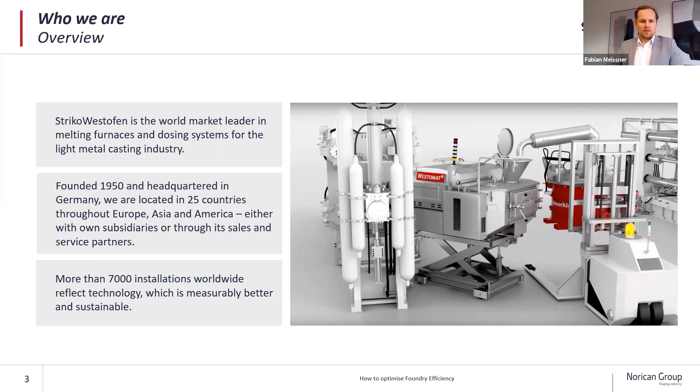And then last on the right hand side, you can see myself. As mentioned, I'm responsible for the sales of StrikoWestofen equipment in the Turkish market. All in all, I think we can offer you a good package.

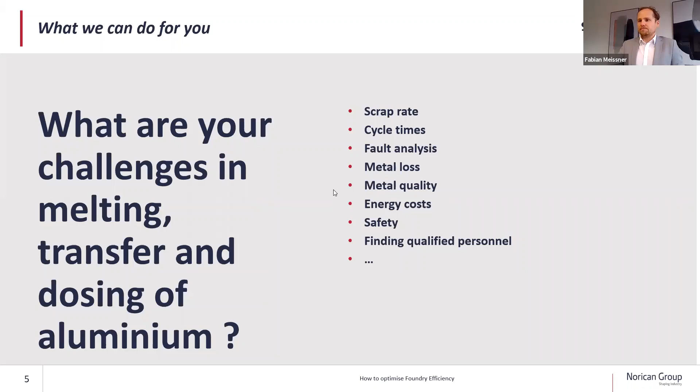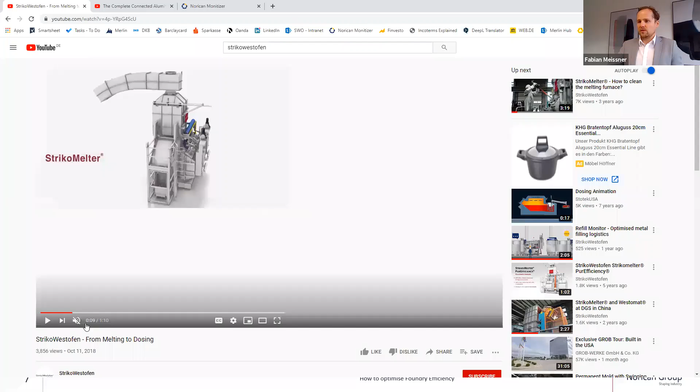Let me share a short video to give you a visual idea of how our solutions look. I will show you this short video of 1.5 minutes, which you can also find on YouTube if you want to see it later.

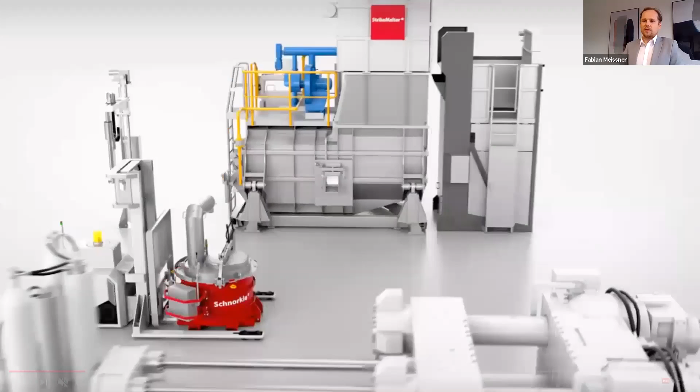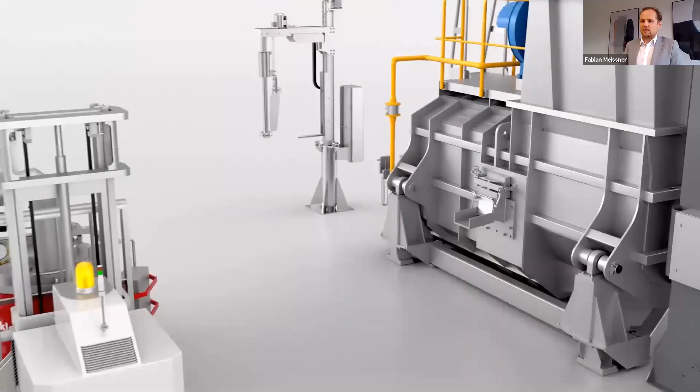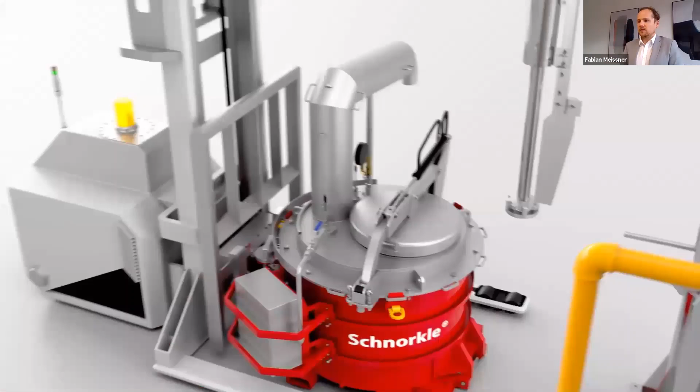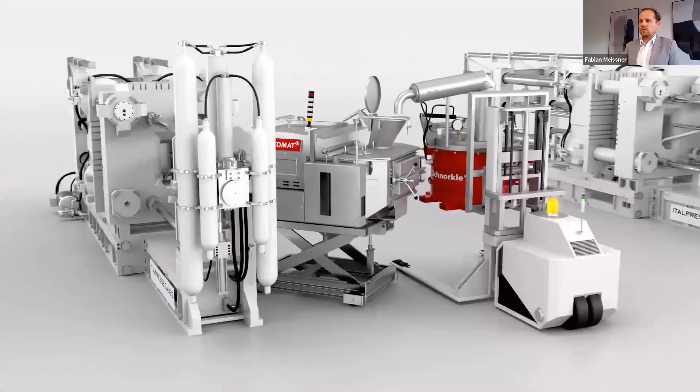Now it's moving to the degassing unit, which we can also supply, doing the degassing process in the Schnorkle, the safe enclosed transport system, and then moving to the die casting machine and to our dosing furnace, the Westomat, delivering the liquid aluminum to the dosing furnace. These are the three products I'm going to talk about today, and I'll give you an overview.

On the shaft melting furnaces, the StrikoMelter, we have around 50 units or more than 50 units in operation in Turkey today. One factor is a very low energy consumption. Another factor is a very high metal yield—you lose very few metal. This can be a couple of €100,000 per year in savings compared to other furnaces.

We have very durable, very high quality equipment. Most furnaces, nearly all furnaces, have a lifetime of more than 20 years, and it's a proven technology. That's why we have many customers in Turkey working with our StrikoMelter.

Then here you can see the Schnorkle, our closed transport system. It's a new product compared to the StrikoMelter and Westomat—a rather new product. Why could it be interesting for you?

It's minimal heat loss because it's closed. If I compare it to a normal transport ladle, you have a high metal quality because you have less contact of air and metal. You have high safety for human and machine because it's a closed system. When delivering aluminum into the dosing furnace, you have a constant flow into the furnace. It's a pneumatic system which ensures an optimal dosing furnace filling, creating less turbulence in the dosing furnace.

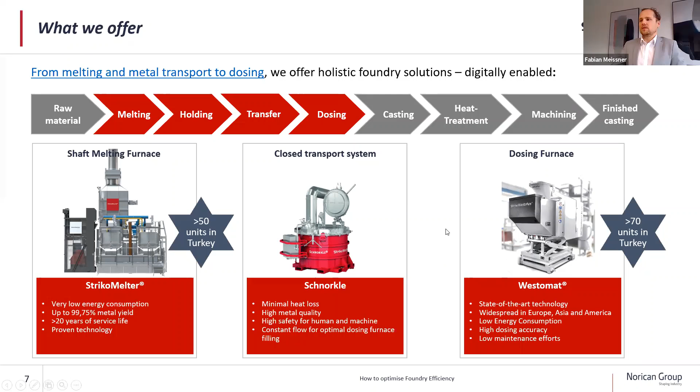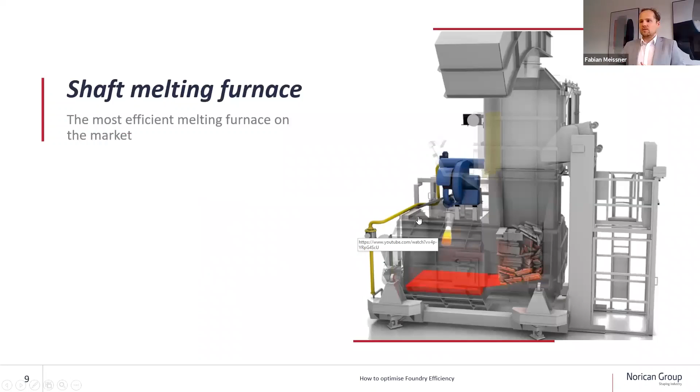So if I may, I would like to start with our StrikoMelter. As mentioned, it's a shaft melting furnace. So what is a shaft melting furnace? A shaft melting furnace is combining the preheating, the heating, and the liquefaction of the material in one shaft.

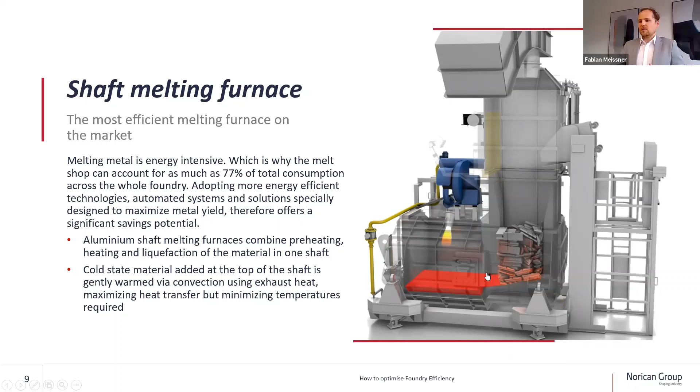So we are using the combustion heat from the holding bath to preheat the material in the shaft. This enables us to use much less energy, or to consume much less energy, and to achieve a much lower metal loss than if you just, for example, alternative technology would be: you take the material, the aluminum, and you put it on a ramp.

On the ramp, you don't have this preheating effect. You are taking the burners and directly impacting the material. This needs more energy because it's not preheated, and it also generates more oxides, because if you directly hit the material with the flame of the burner, a lot of oxidation is created.

I would say, in summary, the secret of the StrikoMelter is in the shaft. It's a lot of technology and a lot of developments over many years that have gone into this shaft, and there's right now no good copy available on the market.

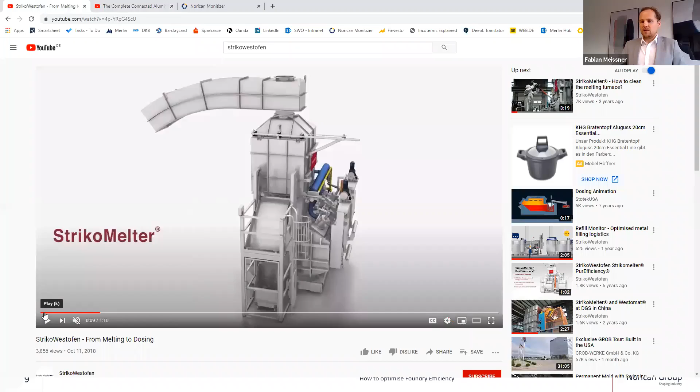So let me show you another video on the process of the melting furnace, the StrikoMelter.

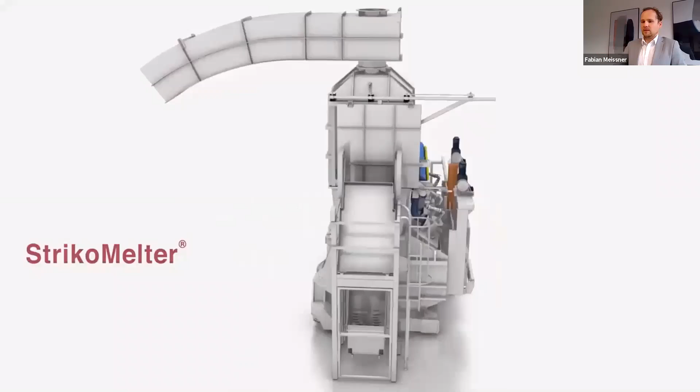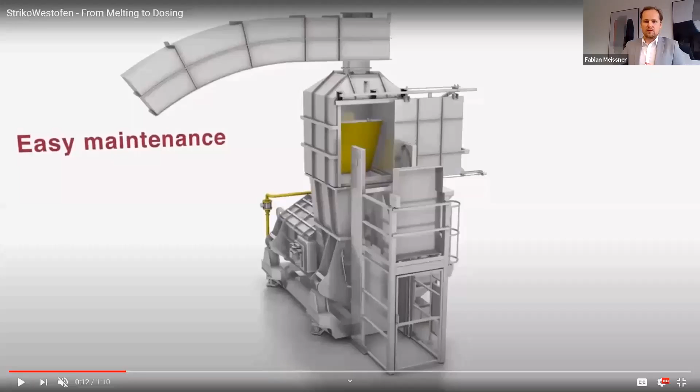So you can see the charging now. Normally we charge a furnace with a so-called charging unit. You have a bin inside of the charging unit, and normally this bin is put into the charging unit by an operator. Once the furnace gives a signal to the charging unit, the charging unit will charge the material into the top part here, into the shaft.

You can find the perfect moment for charging the new material into the shaft with a shaft laser. You can see it here. It's a laser that is going into the shaft and scanning the level, the filling level of the shaft, and when it's below a certain point, it will start charging again. This makes sure that we have a perfect filling level that achieves the lowest energy consumption in the shaft.

Then you can see here the yellow part, that's a baffle or flue cover. This cover is closed once the furnace is charged to make sure that the heat is kept in the furnace.

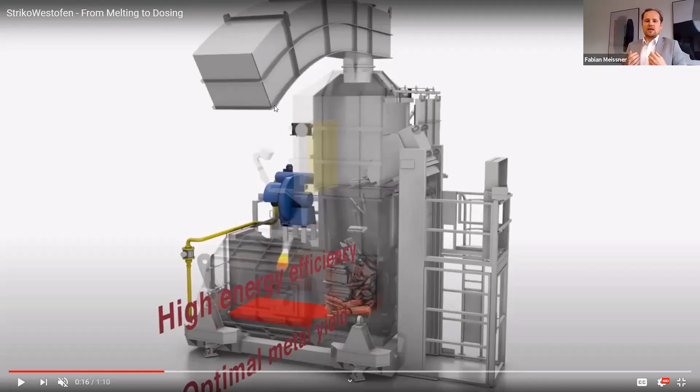We have, you can see, a tiltable version. It's able, if you want to tap out or take out the metal, you can move it, in this case now towards you, and then take out the metal from the furnace. Or we have another version, a tap version or tapping version, where you have an automatic or semi-automatic valve, which you use to take out the metal. There are these two major versions.

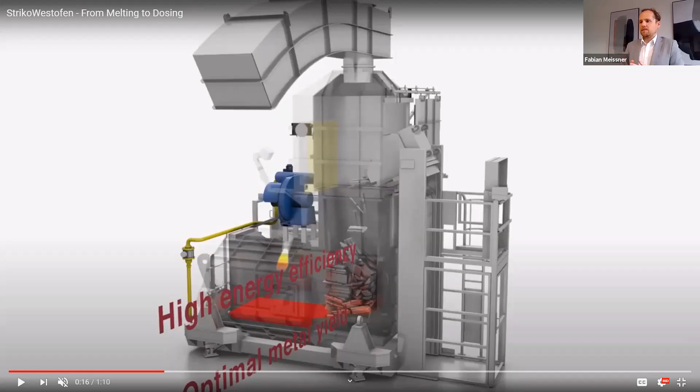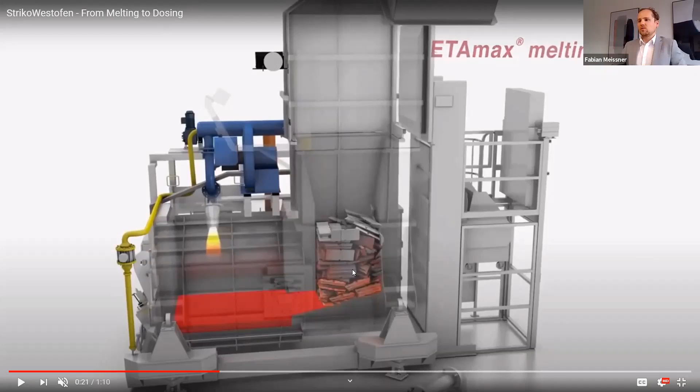You can see it's charged now, and now the preheating of the material is done. The combustion air, due to some under pressure, is going into the shaft, using the heat to preheat the material, and it's slowly melting down and going into the holding bath of the furnace.

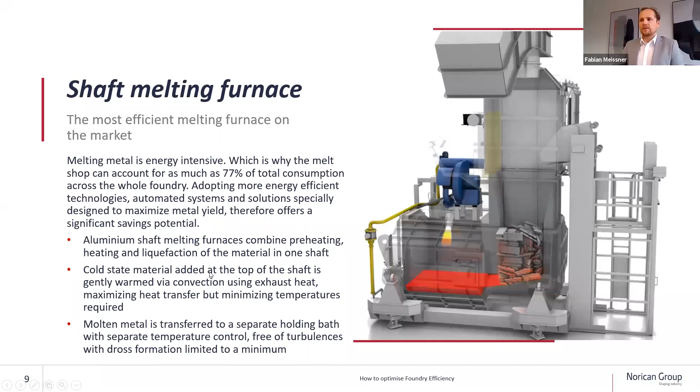So what can we achieve with this technology? We can achieve, as mentioned, an extremely low energy consumption. We have measured values in the field as low as 489 kilowatt hours per ton of molten aluminum. It is the most efficient melting furnace on the market.

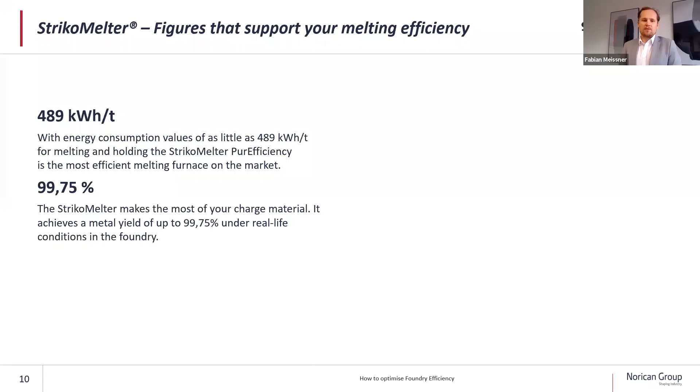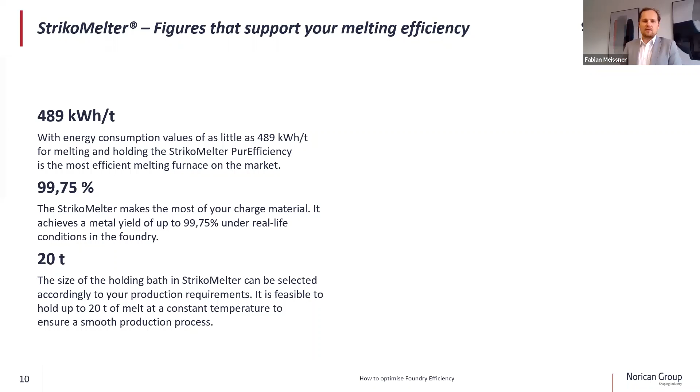We can achieve, or we have measured in the field, a metal yield of up to 99.75% under real life conditions in the foundry. We build furnaces with a holding bath size of up to 20 tons. We can melt parts of up to 2.5 square meter size in our shaft. We can even make the shaft bigger, so for example, when you're working now with structural parts, this could be an interesting solution for you.

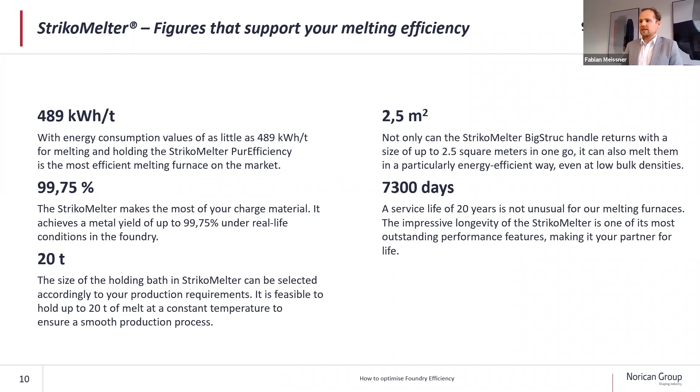As mentioned, our furnaces are very long lasting, and a service life of 20 years is not unusual. We have more than 1,500 shaft melting furnaces, the StrikoMelter model, in the field. This has always helped us to further improve and optimize our system.

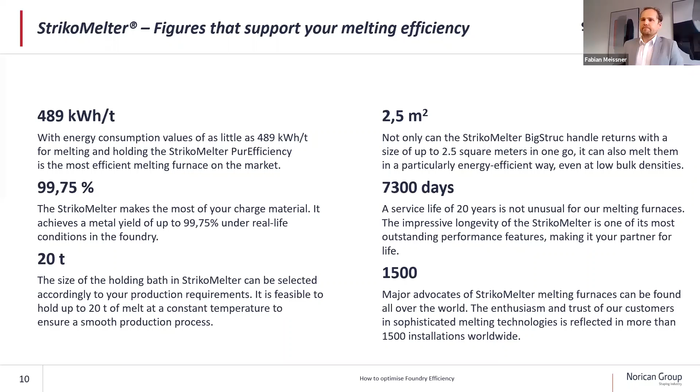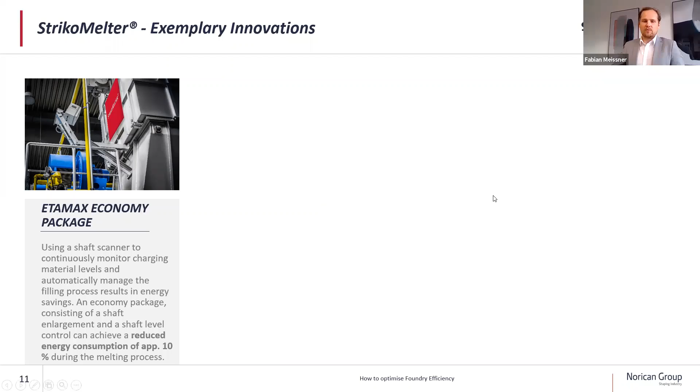We are always constantly working on improving our system. I will not talk about all of our innovations in the last years now, but I would just like to give you some impressions. If you look at these four innovations for the StrikoMelter, what do you think they have in common?

The commonality is that all are focused on generating additional benefit for our customers. As you can see, there's an ETAmax economy package, consisting of the shaft scanner, which you can see here, and an enlarged shaft with a higher volume. If you take this package, you can achieve an energy consumption reduction of approximately 10%. It's not the case for every type of casting, but for many it is. When you have an inquiry, we can look at your castings and the returns you're intending to remelt, and we can evaluate this.

We have also developed a new special type of shaft cover, or so-called hot gas baffle. The hot gas baffle is closed during the free melting process. For every shift, you need to close the hot gas baffle to free melt the shaft once. This baffle makes sure that the free melting process is even faster and consumes less energy - in this case, around 15% less energy consumption during the free melting process.

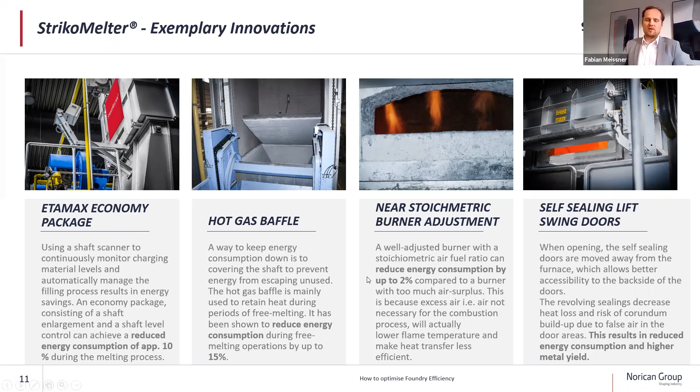Another innovation in the area of our software solutions is the so-called part load efficiency control. That's a software solution that makes sure your melting process is running efficiently even when you are not operating your furnace at full capacity. Sometimes you're only using 50% or 60% of the melting capacity of the furnace, and for this situation we've developed a special software which we launched to the market this year, called the part load efficiency control. It's really impressive what you can achieve with those adjustments in the software and operation of the furnace.

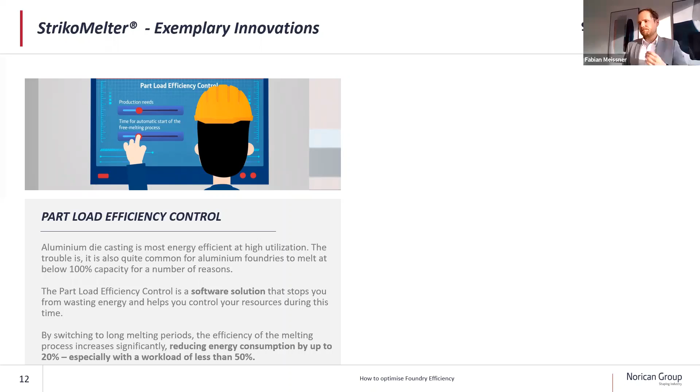Another digital product that we launched to the market this year is not only for our melting furnace or dosing furnaces - it can also be used for die casting machines or any other type of equipment in your foundry. It's called the Monitizer Global, and it's a digital platform that you can use to access all of your machines' or foundry's data in a good dashboard. We have built up the architecture to easily extract information from the machines, transfer the information to the cloud, and then display it in the front end, called the hub, or the Norican hub.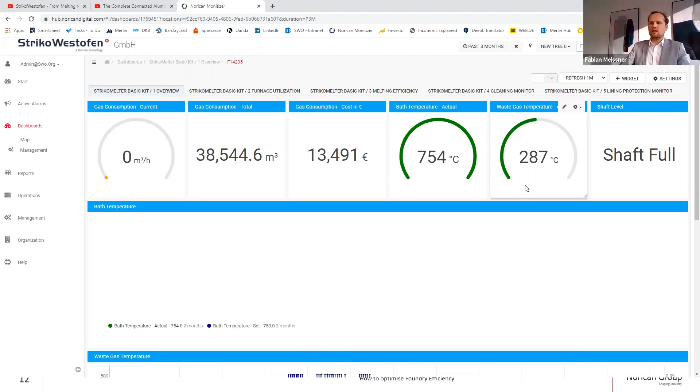To briefly give you an overview of how this looks, I'm showing you real live information from one of our systems that is online - one StrikoMelter located in Germany. You can see these views here, and you can create an individual view depending on what data you want to see. Here you can see, for example, what the gas consumption was over the last 3 months.

Let me change that - I would like to know what the gas consumption was over the last 6 months. Let me just refresh.

Over the past 6 months, with one click you can get all of this information, or you can see what the cost of the gas was when you put in your cost for purchasing the gas. You can easily see this here.

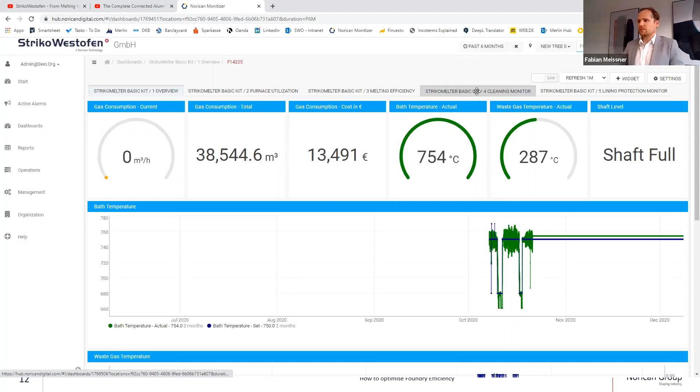You can see your actual bath temperature, the waste gas temperature, and so on. And you can, for example, also look at what were the free melting times.

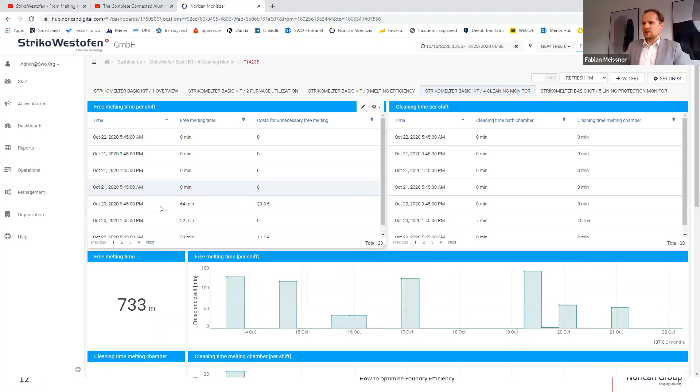If you look at the past 3 months, you can zoom in here into this week. You can see, oh, here I did a free melting time of 64 minutes. That's not necessary according to the standard, the manual. So you exceeded your free melting time, which costs you money. It actually costs you €23.80 at your gas price. So this is just one example of how you can use the software to check how well you're operating the furnace and maybe take some measures to improve and save money.

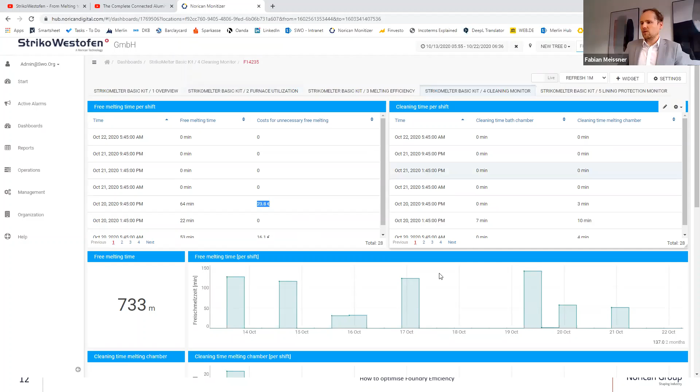You can see the cleaning times per shift: how much time was the holding chamber cleaned, how much time was the melting chamber cleaned. So you can monitor what else.

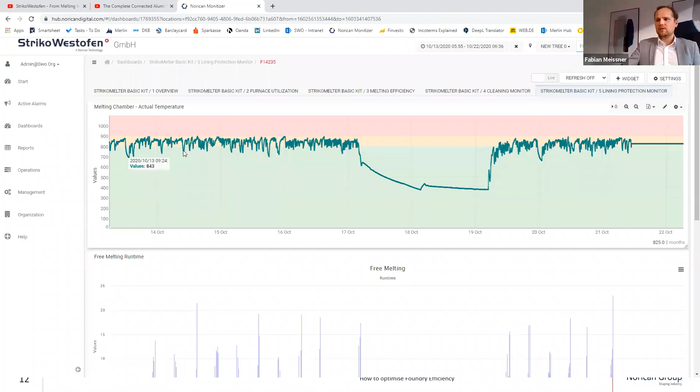You can see a lot of data, for example here you can see the temperature in the melting chamber. We normally say if you go above 900 degrees, you have a high risk of damaging your refractory, so this is a red zone. If you are between 800 and 900, it's not optimal - we would rather recommend to stay below that in the melting chamber. But this helps you see how the furnace is run, at what temperatures, over time.

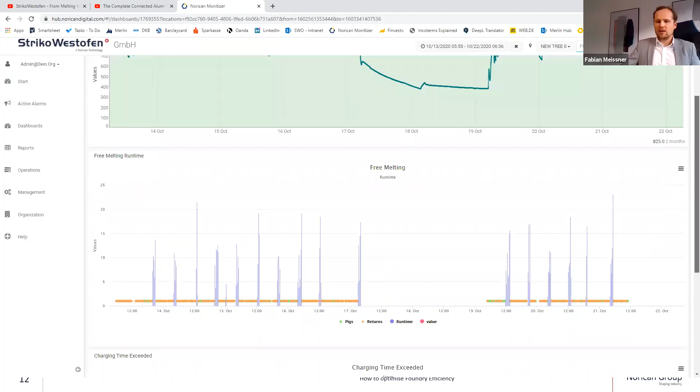So there are lots of possibilities that this new product, Monitizer Global, offers to foundries. If you're interested, we can also retrofit this in an existing foundry or existing equipment. It's not only possible to use new equipment with this software, but also to connect old or existing equipment.

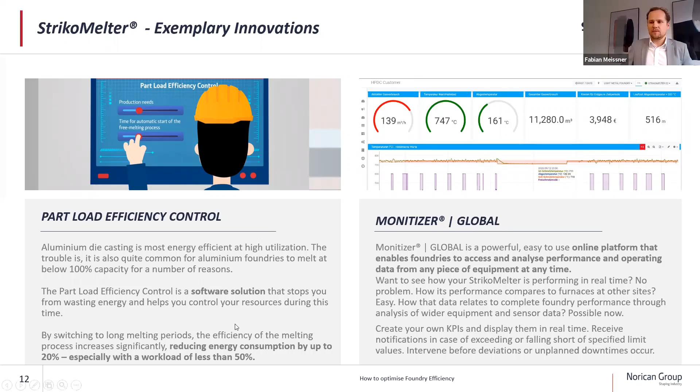Then I continue to our transfer solutions, the Schnorkle. As mentioned, it's a closed transfer system which helps you have a more reliable process because you have less contact with the air. It's a closed system - you're not moving around the foundry with an open ladle, and if there's an accident with the forklift, you may have health issues or people that get hurt.

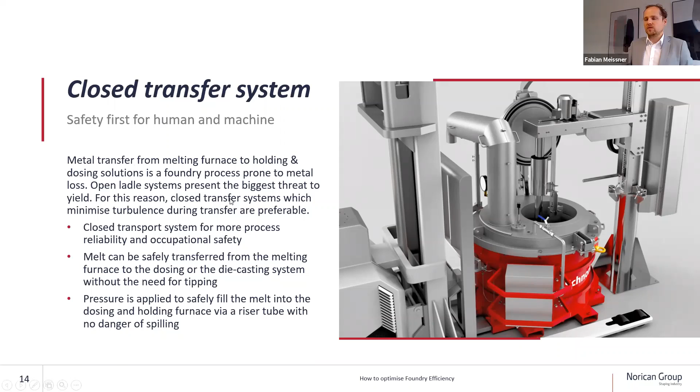This system is closed, so it's more safe. When you try to refill the dosing furnace or another type of furnace, you don't need to tip the ladle. You can use a pneumatic system to refill, so no tipping is needed, and there's no danger of spilling liquid aluminum, which creates danger for your personnel and colleagues.

Quality: there's less air contact during the transfer because it's closed. Less temperature loss - you don't need to overheat your metal in the melting furnace to account for losses, because in an open system, an open ladle, you might lose some aluminum during transfer. So you can actually be melting at a lower temperature because you lose less energy while transporting the aluminum to the die casting machine.

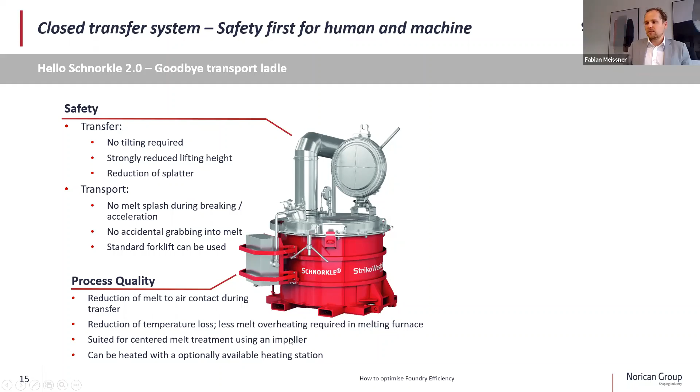You can also, like shown in the video, do the melt treatment in the Schnorkle. I think those are the main advantages I'd like to present on the Schnorkle: it's safe, it gives more process quality, and it's a more stable process that you can achieve, with higher metal quality.

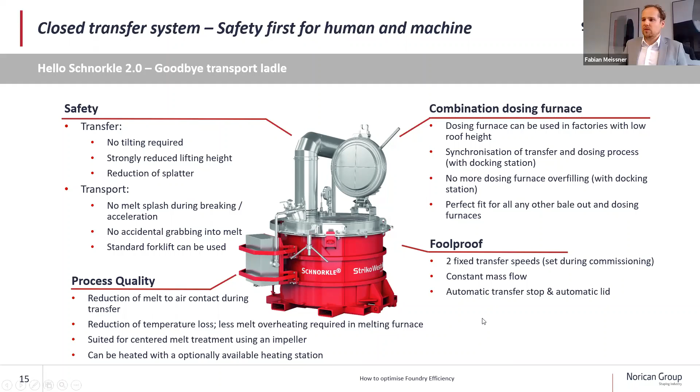Let me go to the dosing furnace itself and give you some general introduction. Let me explain the process.

We are working with an overpressure that is generated in the furnace chamber, and with this overpressure we are raising the metal in the riser tube, which you can see here, to a top stop position. A top stop position is basically where the metal in the riser tube is above the level of the bath in the furnace. So let me show you the animation.

Okay, so here you can see now we are creating the overpressure. We're starting to create the overpressure. You can see that the metal in the funnel here is rising, and then we are waiting for the signal from the die casting machine to start dosing into the shot sleeve. You can also see that the metal is taken from below the surface, so we are making sure we're not sucking in any oxides, which are not so many because it's a closed system.

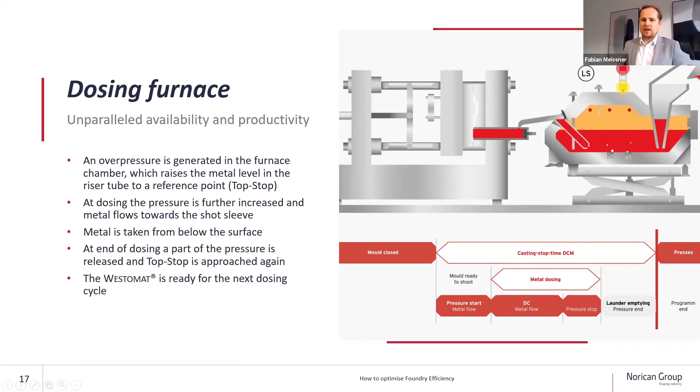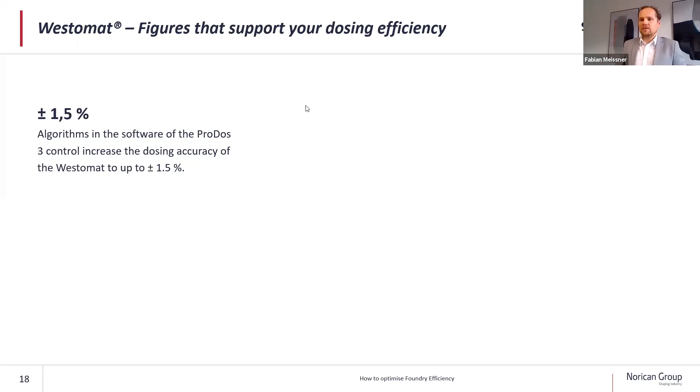It's compared, for example, to a holding furnace with a ladle. It has many advantages. Main advantages I would like to raise in general of the system are our high dosing accuracy. We have a sophisticated software developed over many decades, which is called ProDos 3. Due to the fact that there's no open bath surface, we have less energy consumption than an automatic ladle system with a holding furnace, which reduces energy costs.

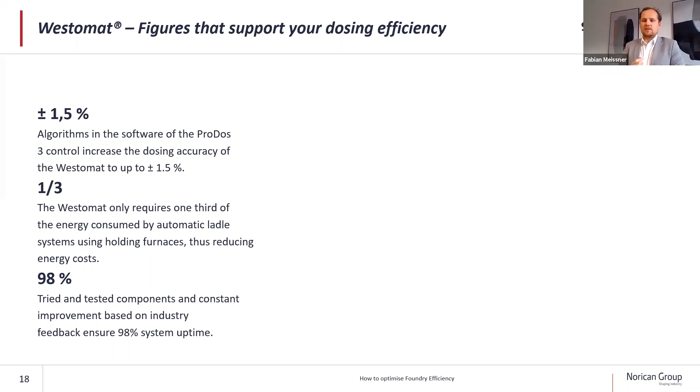It's a system that is nearly all the time running. Based on industry feedback, it's running 98% of the time, or even more. We have less metal loss than a ladle system with a holding furnace, because we don't have the open bath surface, and we have a very high temperature stability, again due to the fact that it's a closed system. Normally we maintain the temperature within ±2 degrees Celsius in the bath of our furnace.

Also compared to other systems available on the market, not only the ladle, but maybe also pump-based systems or other systems, there are many advantages. So if you have doubts about that, we're happy to have a technical discussion with you on the differences between the different systems and the potential advantages and disadvantages for you.

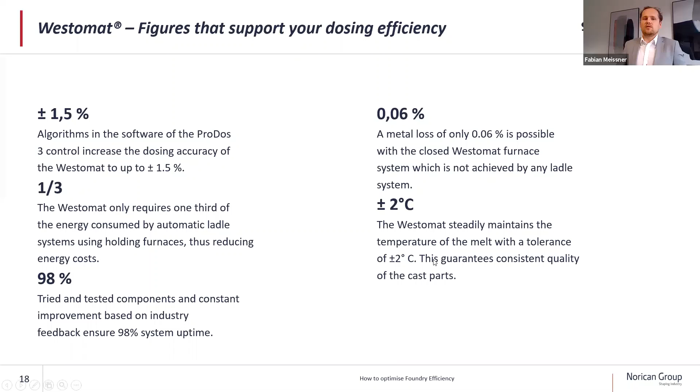Also, like for the StrikoMelter, I would like to present some innovations to you, only some. This year we launched a new model of our Westomat. It's called Westomat Duo. The difference compared to our classic Westomat is that we have two openings here, one on the left and one on the right. Normally the opening is here.

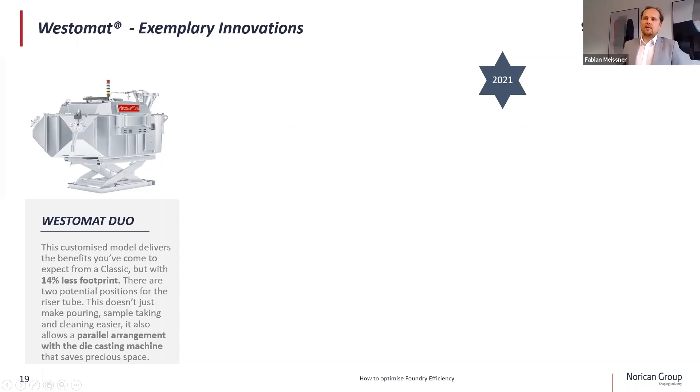This enables us to achieve a parallel arrangement of the die casting machine and the dosing furnace. So instead of having it like that or like that, we can actually put both machines in parallel. This has a big advantage if you have not so much space, maybe in your foundry, because it's a historic foundry or so. Then you can sometimes squeeze in an additional die casting machine with this parallel arrangement of die casting machine and dosing furnace.

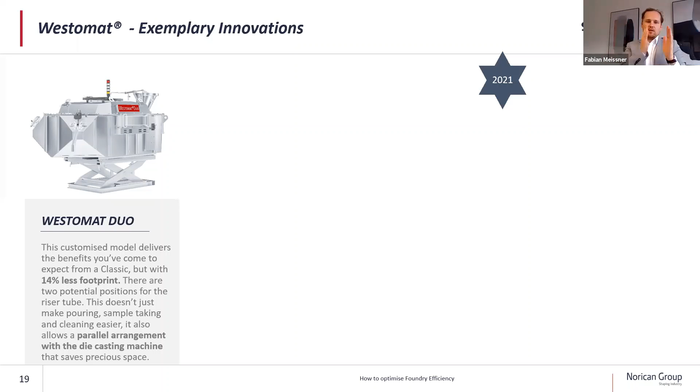Yeah, we have also released some updates on our ProDos 3 control. One very classic software feature, for example, is the biscuit size correction. In short words, we get a signal from the die casting machine of the size of the biscuit, and based on this size of the biscuit, we continuously adjust the dosing process to make sure that the biscuit size gets reduced, which again reduces scrap.

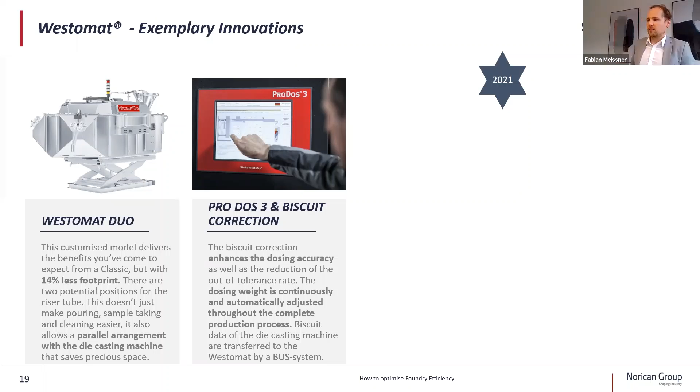We are also going to launch next year a new filling funnel and a new filling tube to the market. So here you can see this is a filling funnel, this is a filling tube, and we have optimized them to achieve a longer lifetime. These are ceramic parts, so their lifetime is now significantly longer than our previous designs.

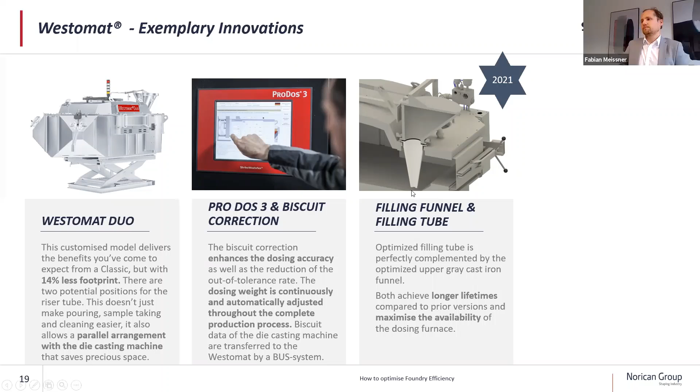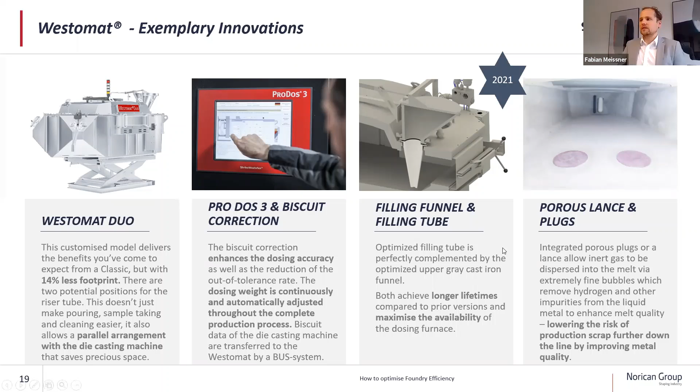Then we also have some new insulation of our furnaces. This is also one big difference to our other furnaces. We have a very high quality special insulation which helps us to reduce energy consumption, and the release of our special insulation is achieving a 10% energy consumption reduction compared to our previous standard.

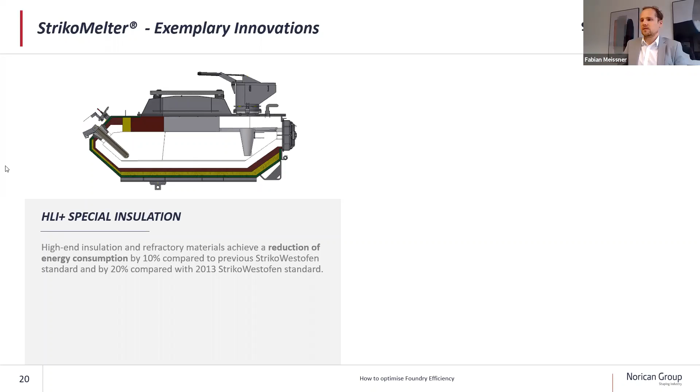And also here, like for the StrikoMelter, we have a digital solution, which we call the Monitizer refill monitor. Maybe some of you already have a refill monitor in your foundry. You need to imagine that this information is displayed, for example, on an iPad or on another tablet, which is mounted on the forklift, or which is mounted on a big screen in your melting department, and it shows the filling level of the different holding furnaces or dosing furnaces.

These are standing beside your die casting machine, and it's telling you when you need to refill, or when the forklift driver needs to refill the holding furnace or the dosing furnace to make sure it's not running empty. It also tells you what type of alloy you need to fill in. So every color here means a different type of alloy. Yeah, it makes sure, for example, that your forklift drivers do not forget to put liquid metal into one of your furnaces, and then the die casting machine stops producing because there's no supply of molten metal anymore from the furnace.

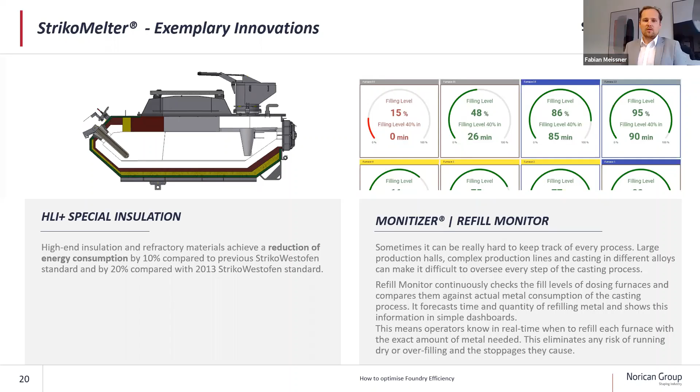With that, we're getting to my summary, and it's pretty brief. We think that optimizing the furnace efficiency, the metal transfer, and the dosing can make a huge difference to long-term success. We offer solutions that help you reduce your costs for casting and stay competitive. We hope we can continue the dialogue or get in touch, and if you have a requirement for a furnace, we'd be happy to make an offer or develop a concept for you.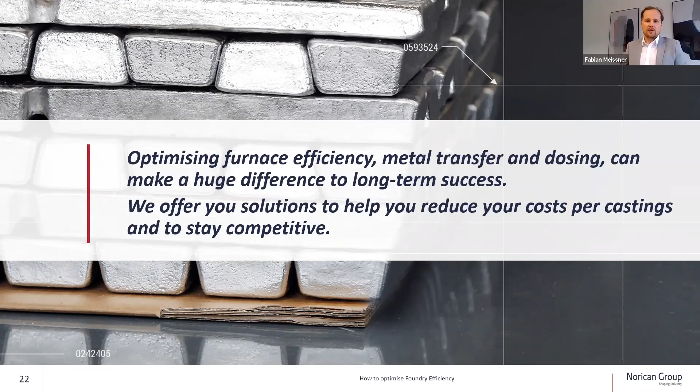Please do not hesitate to reach out to me or to our agent, Metek. We're happy to support you. This is my email address where you can reach me, and we can also have a phone call whenever you'd like. So now I'm happy to hear your questions, and I hope it was not too fast or too slow, and all understandable what I presented today.

Thank you very much, Fabian. That was very informative, and hopefully all my colleagues learned something plus from your presentation.

There was a question coming from Alper Ulutaş. He's asking how can we get this Monitizer software, because you said this is a program that could be assembled or uploaded to old machinery or other machinery as well. Yeah, Alper, which company is Alper working for, just for my understanding? Do you know? Let us ask Alper Ulutaş to write down his company name there.